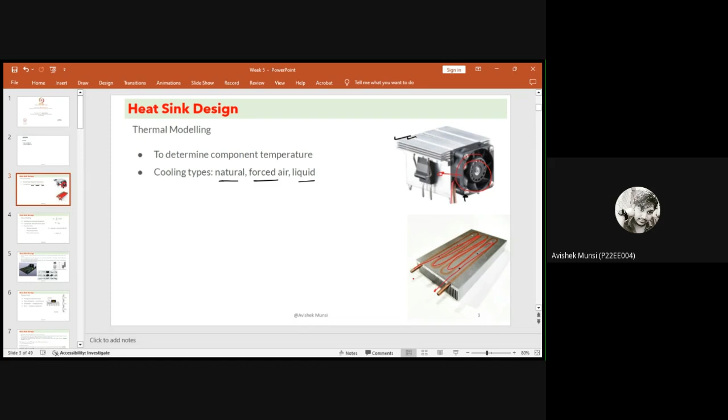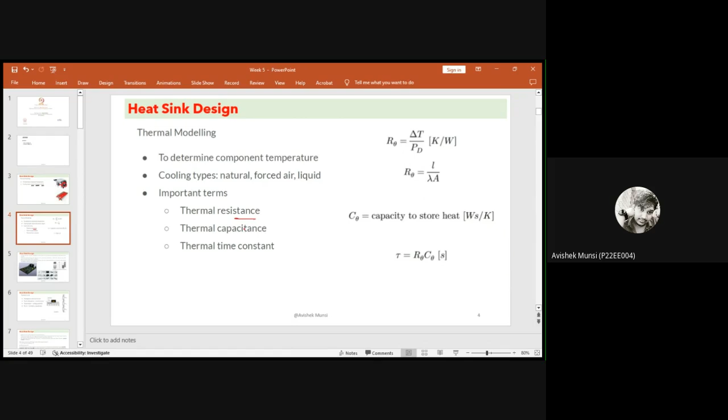So basically what we do in thermal modeling and heatsink design is to determine the component temperature in terms of the thermal resistance, thermal capacitance, and thermal time constant. So basically what is that? If we see what thermal resistance is, that is basically the difference between the temperature of the material.

In some cases, they also use a heatsink behind this PCB, if the heating element is more. Okay. So what happens whenever you're using a heat sink? Suppose this is your MOSFET, right? On the MOSFET, we use some kind of thermal compound, a grease type material, after which we use the heat sink.

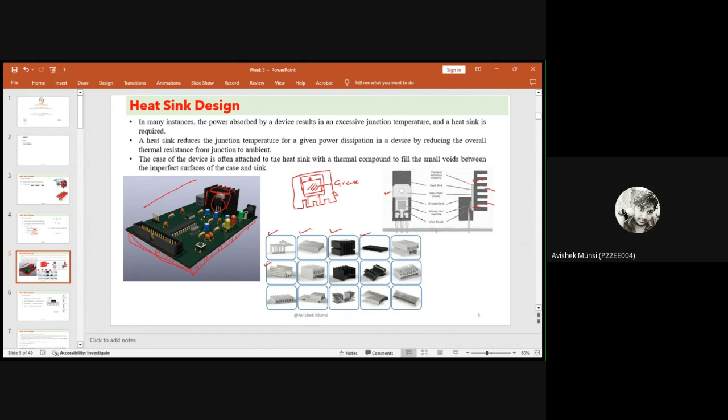Okay. So here you can see that this is the heat sink. This is the MOSFET. So it should have a junction temperature, junction to case, case to sink, and heat sink to ambient, right? So there are a lot of temperatures and resistances we have to consider while designing a heat sink for a specific MOSFET.

So this is the heat sink, and this is our MOSFET, and there is a case. You can consider that this is the case of the MOSFET, after which there is a junction point where the MOSFET touches the heat sink, right? So there will be different resistances according to that. So this is my junction and this is my ambient. Ambient means the surrounding air temperature. Okay, and this is the temperature of the case. This is the temperature of the sink.

Okay, so between the junction and case, there is a resistance R theta JC. Case to sink, there is a resistance R theta CS, and sink to ambient, there is a resistance R theta SA. So there are three resistances: from junction to case, there is the junction to case resistance; then for the sink temperature difference there will be case to sink; and this is ambient or atmospheric normal temperature,

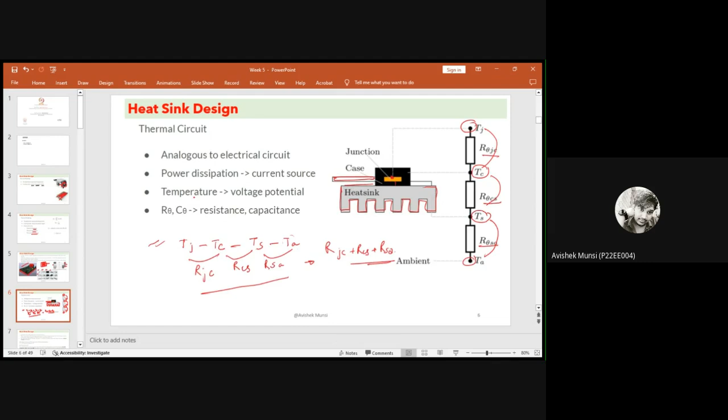So what is basically thermal resistance? From here, if you see, it is a function of the thermal power. So basically the temperature difference between 2 points divided by the power of the component is the thermal resistance. Okay. So how could you write these things?

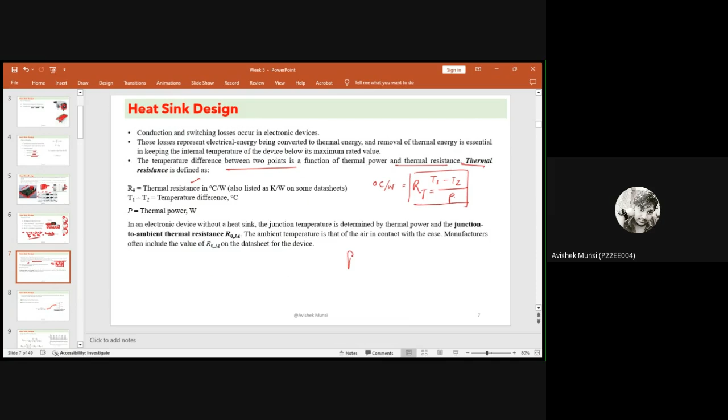From the expression you see that thermal resistance is in degree Celsius per watt. That means the change in temperature divided by power can be written as thermal resistance. So if you have to consider how much power is lost, that will be the temperature difference divided by the thermal resistance.

So if we don't use any heat sink, then that temperature is called the junction to ambient thermal resistance, because in that case you are using a switch directly that is exposed to the surrounding atmosphere, so we have the surrounding temperature, that is the ambient, and we have this junction temperature.

So how much heat it will dissipate: R theta JA is equal to theta J minus theta A by P. So how much power it will dissipate: theta J minus theta A by RJA. By means of this formula, we can solve the basic heat dissipation in a switch. Okay. So in your data sheet, you will find these values.

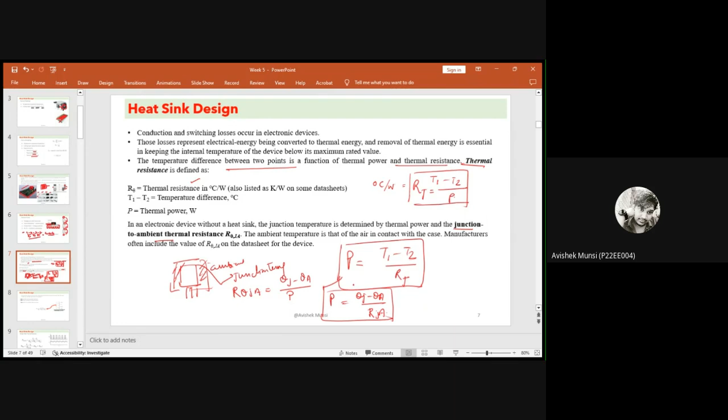Now, if we consider the heat sink, then we have junction, after which we have the case, after which we have the heat sink, and then ambient. So in that case, what will happen? We have the power dissipation, the total change in temperature from the junction to the ambient, and we have to consider all three thermal resistances: junction to case, case to sink, and sink to ambient. Okay. So this is the heat sink power dissipation.

Fine. So after this, if you have any doubts, you can ask me or note it down in your copy. I'm giving 5 minutes to understand this, and after which I will continue.

Jaya Kumar, kindly mute yourself.

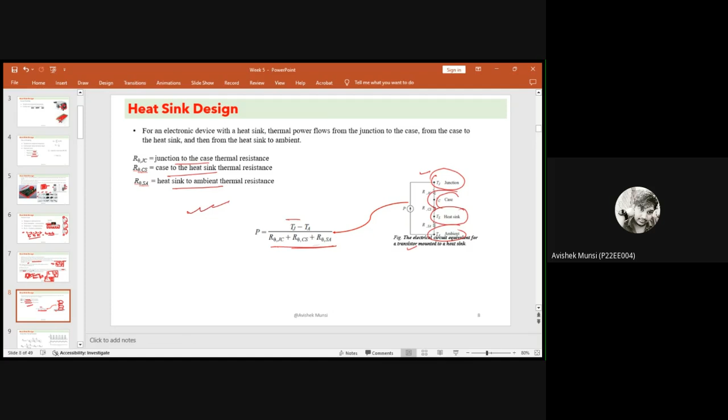So what is the average power then? That is the junction temperature minus the ambient temperature divided by all three resistances, as I said. So if I have to calculate the sink to ambient resistance, how could you calculate it? Basically you just divide the change in temperature by the PD average, minus these two resistances. Right, so that is the sink to ambient resistance.

Okay. If you simulate it in LTspice or anywhere and you get this PD average for any MOSFET, for example, you take this junction temperature based power from there and put it here in a current source, and you put these resistances that are given in the data sheet. If you go through any MOSFET data sheet, you will find these resistances given, if you have to model it like this.

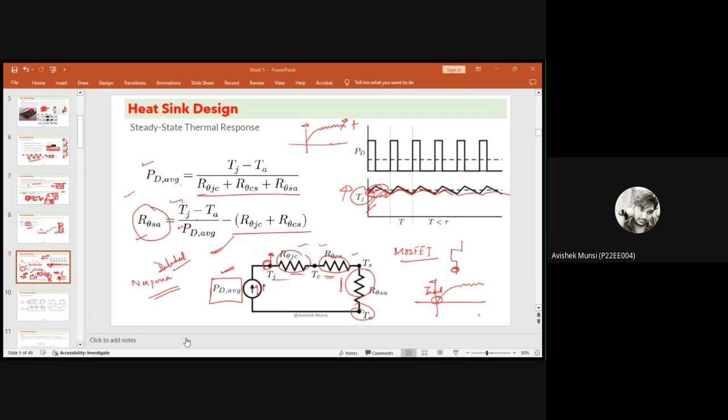I hope you all understand and note it down in your copy. So, as I said, while doing a thermal model, if you go through the datasheet of any MOSFET in Nexperia, that will be more helpful. If you go through the datasheet of any MOSFET in Nexperia, you can see that other than the thermal resistance, they will give some kind of capacitance value also. So basically, this is the RC modeling of thermal modeling.

This is the most conventional method of thermal modeling for any kind of switches. Other than that, you can also model it in finite element analysis software like ANSYS or Flotherm. After designing the PCB of your converter, you can put it over there, and if you mention those values, they will give the areas where the temperature will be high or low. That will be the FE analysis, the thermal analysis done with ANSYS and all.

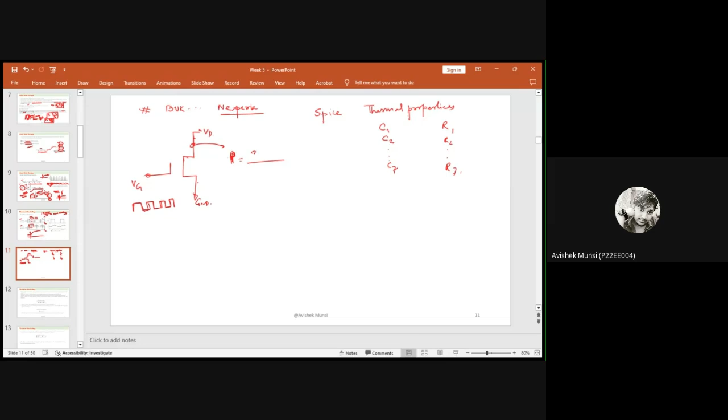If you use LTspice, then by means of Alt+Shift, if you click it here, you are able to understand how much power is dissipated here. So knowing that value, suppose it is x into I plus y into V like this, you just have to put this as a behavioral current source and put this value. And after that you have to model it in either Cauer method or Foster method. Foster method is more preferable. So you can model that.

This is C1, this is R1. Then you have to put this value like C2. Sorry, this is R2, C2, R1, C1. Okay, like this, dot, dot, dot. And finally, after the final one, you have to put the ambient temperature as a voltage source. Either it is 50 degrees Celsius, 25 degrees Celsius, 80 degrees Celsius, you can put it over there. And then you have to run the simulation and check the temperature at this point. That will be the junction temperature.

Okay, so that is how you are able to model the thermal model of any MOSFET. So this is the process of doing thermal modeling of any MOSFET.

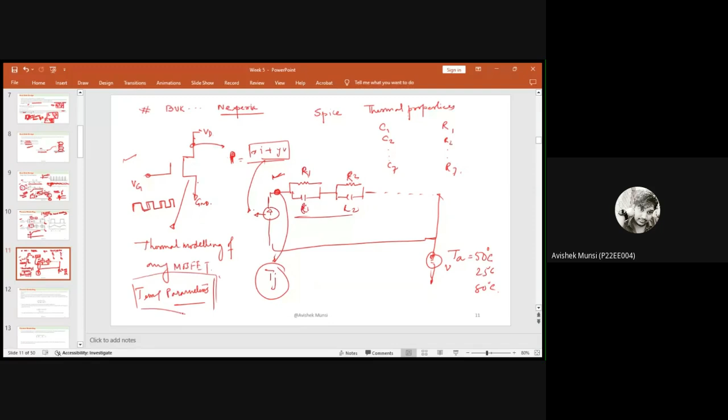If you don't have it, then you have to go through these methods, the Cauer network method or the Foster network method. Okay. So here also you can see that this is the pulse which we give to the MOSFET, and in that region we are able to see how much temperature will rise at that period of time. Okay. So that is the thermal modeling of any kind of MOSFET switch. Okay. So now you can note down the process, and after that we'll move to the next thing.

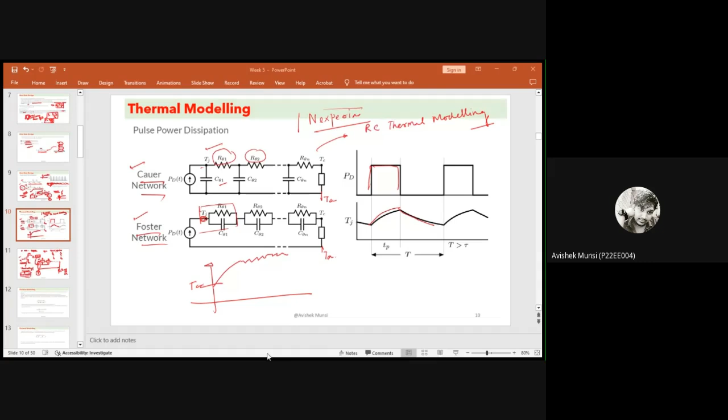Fine. So this is how the thermal models can be done. What is basically the Foster model, which is more preferable? The Foster model is derived by semi-empirically fitting a curve to the thermal impedance ZTH, the result of which is a one-dimensional RC network. You can see it from here. So this is the Foster network. It's one, two, like this, going on up to n number of RC by which you can model it.

The RCs in a Foster model do not correspond to any geometrical location of the physical device. These values cannot be calculated from the device material constants, but they have to be given in the datasheet by the manufacturer, or they should provide the thermal model. Otherwise, you are not able to solve it, as you are not able to calculate the RC inside a MOSFET or any switch, right? So finally, the Foster RC model cannot be divided or interconnected when there is an RC network of a heat sink connected to it. Okay.

By knowing the TJ, T theta inside of the datasheet, they already modeled it into it. So I have to put those things. So Foster RC model has the benefit of ease of expression of thermal impedance ZTH. As I said, this is semi-empirically fitting the curve of the thermal impedance. The Foster model can be done.

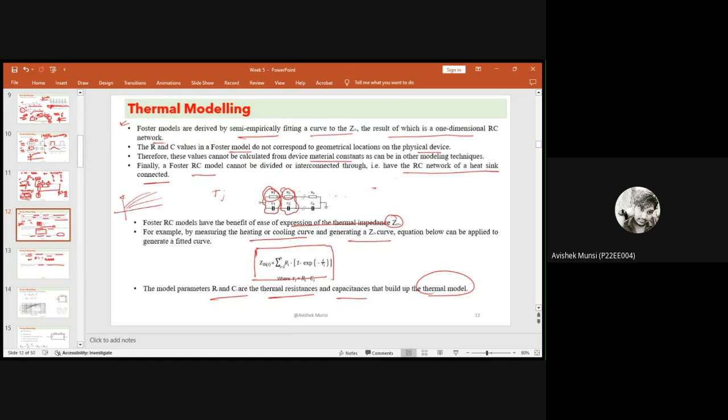Okay, the nodes in the Cauer model can have physical meaning and allow access to temperature. You can check the temperature at this node. Similarly, in Foster, you can also check things at this node like this. In Foster, if you are using it like this, you can check the temperature at these junctions also, but this will not be the actual junction temperature. Okay, so that is how you can model any MOSFET or anything else.

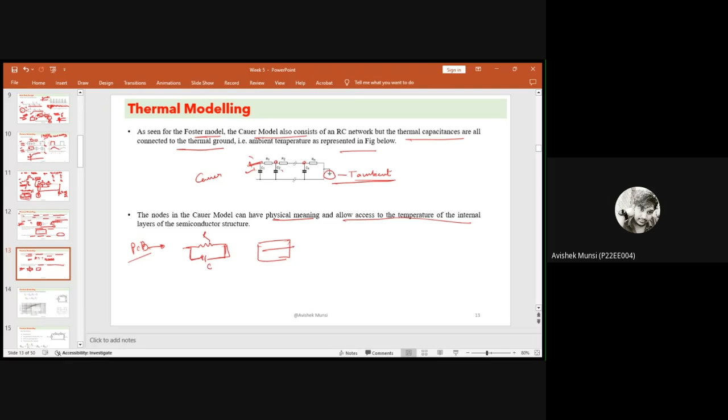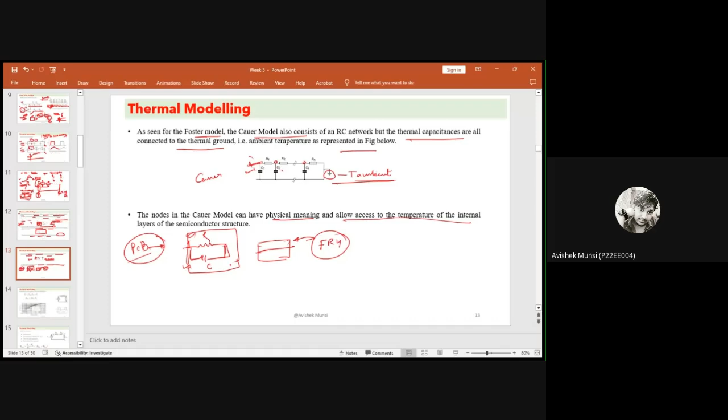But while designing the PCB of any converter, you have to consider the RC thermal model for the PCB also. You have to calculate the capacitance of the PCB by knowing how much copper it uses. By knowing that, you can calculate the PCB's RC models and put them there. Mostly FR4 material is used, right? So for FR4 there are specific values you have to put, and you have to model the PCB's RC also, and in this way you can completely thermal model a converter. Okay.

So as I said, the pulse dissipation method, you can see this is there in the datasheet. There will be a Z curve, the thermal response with respect to the rectangular dissipation. There will be some curve, and according to it they put the values of R and C at various junctions. So you have to put those values while modeling.

In some datasheets, they don't give the extensive values of all the R, C. Rather, they give the thermal impedance as a whole, and you can put that thermal impedance here and also calculate the rising temperature of this junction, how much temperature it can hold and how much it will rise. Okay, so that is how we can thermal model any converter switches, the converter totally with PCB, and have a predetermined value of the temperature rise of the converter.

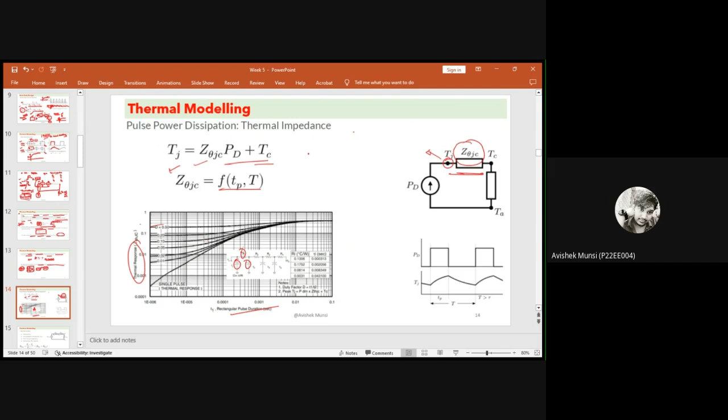So now, how to select the heat sink. While selecting the heat sink, you have to know these temperatures. These are given in the datasheet. If we go through any MOSFET datasheet, you will see they give the junction temperature, case temperature, and so on, based on which you have to calculate the resistance. And based on this resistance, you have to choose the heat sink from the market.

You have to choose the heat sink which has an adequate value with respect to this R theta SA so that it can withstand that amount of temperature. Basically, this is the sink to ambient. So whenever you're using a heat sink after this MOSFET or switch to the ambient, it should provide thermal relief to the switch so that it doesn't heat so much and it will not affect the other components of the converter, right?

So proper designing of the heatsink is important. I see that many people design PCBs without knowing the proper values of their heatsink. They just put a heatsink by buying it from the market. Often it works, but that doesn't mean it will work every time. If you have a temperature greater than that, then that heatsink will not provide any kind of insulation to your PCB or your converter.

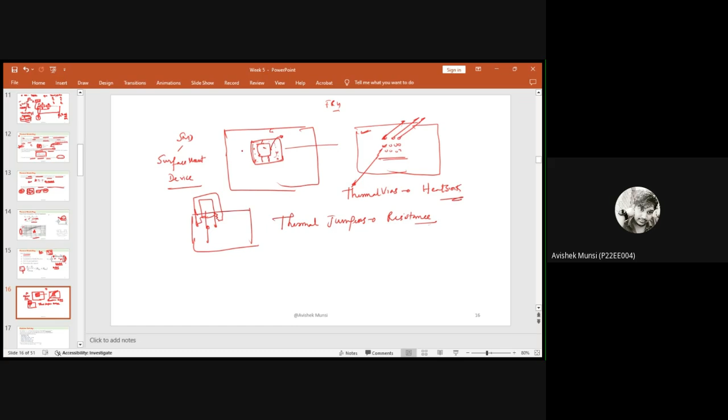If you are not able to create thermal vias because you have a component at the back, like the gate driver on the back side of your MOSFET, then you can create a thermal via here and just connect it by means of these thermal jumpers. So these are the techniques we use in converter design for SMD components. But for through-hole components, you have to directly put the heatsink.

So proper heatsink calculation is very important while designing a converter, and you should keep it in mind. Otherwise, if you put a random heatsink, maybe it will work, but maybe not. So you should go through these things and have predetermined knowledge about how much heat your system can withstand. For that, thermal modeling and the heat sink is one of the most important parts of design.

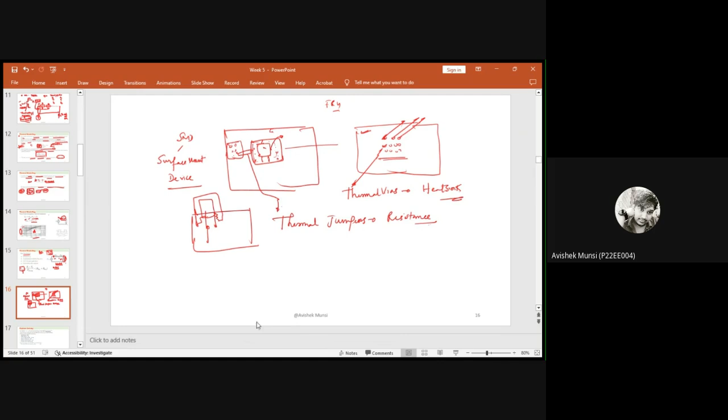Okay. So we will move into some problem solving, and before that, if you have any doubt, you can ask me, because these are very practical things, and you should understand them by your experience of designing converters. By knowing the formulas, you can design it, but if you design by your own experience, you will understand these things. Like I said, for SMD devices we often don't use any heat sink. We use thermal vias and thermal jumpers. These come from the experience of designing converters day by day.

So if you have any doubt, you can ask me, because these are the most practical topics you should go through. Only solving problems will not help you in designing the converter in a practical situation. Okay. So if you have any doubt, you can ask. Otherwise, go through this before moving into the formula-based problem solving. Okay.

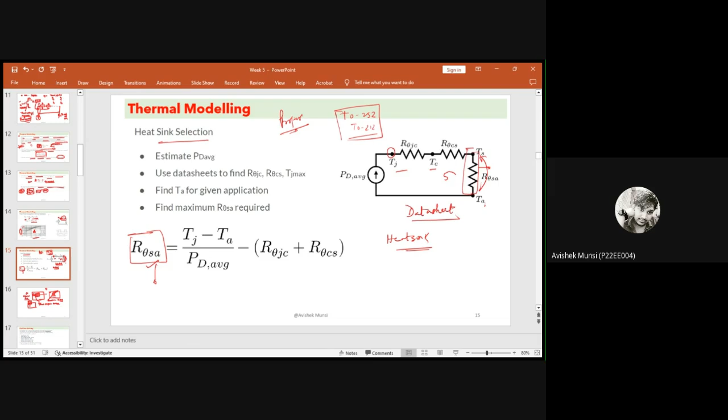Fine, so I understand you already. If you don't have any questions, we're moving into the problem section. So this is the problem. You should download the datasheet for IRF530NPbF, and I will give the datasheet over here also. We are designing a converter with a switching frequency of 100 kilohertz, and the ambient temperature is given as 60 degrees Celsius. The output voltage is 20, input voltage is 40. So that means it is a buck converter.

If you have to design the converter, while designing, you have to go through the datasheet. So from the datasheet of this MOSFET, IRF530N, you have to find what the on-state resistance will be. Firstly, download it. Or if you don't download it, you can see it here. If you download it, you'll be able to see it written at the top. So what will be the value? Kindly download it and then tell me the answer.

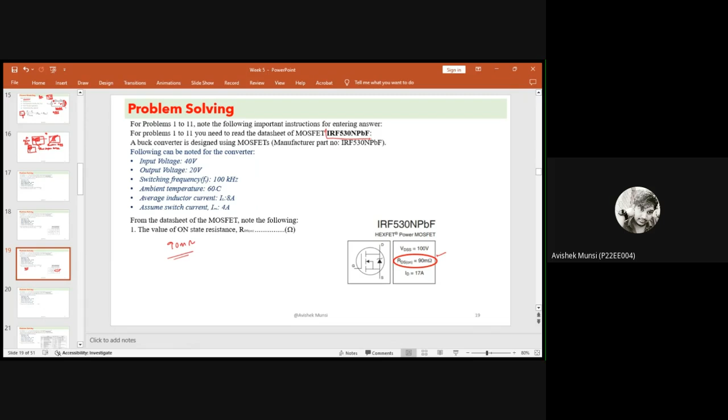Okay. Next question, you have to calculate the typical turn-on time, for which the datasheet is given here. I attached it. Try to calculate the typical turn-on time. I'm giving 2 minutes. Okay. 31.

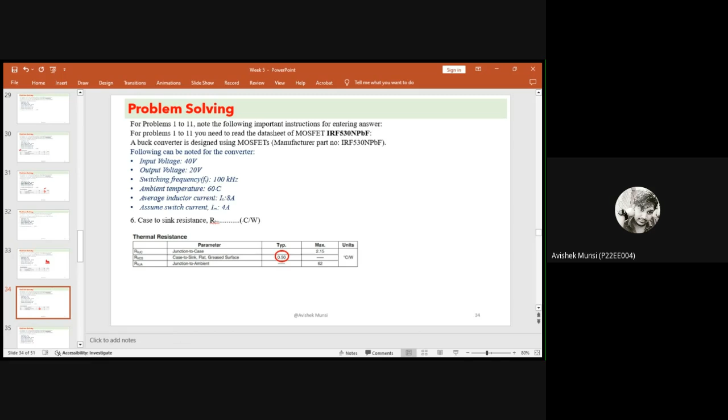So next question, but before moving into that, I'll ask something. We have R theta CS given as 0.50, right? We have R theta JC as 2.15 degrees Celsius per watt, right? We have TJ as 175 degrees Celsius, right? Now, we also have R theta JA given as 62 degrees Celsius per watt, right?

So if we have an ambient temperature of, suppose, 60 degrees, then can you say what will be the power dissipation for this MOSFET? We have all these values in the datasheet, right? And we know the ambient temperature; you can select it because that will be the temperature at which you are conducting your experiment. So what will be the dissipated power? Can anyone calculate it? I'm giving 2 to 3 minutes. Calculate and tell me the answer.

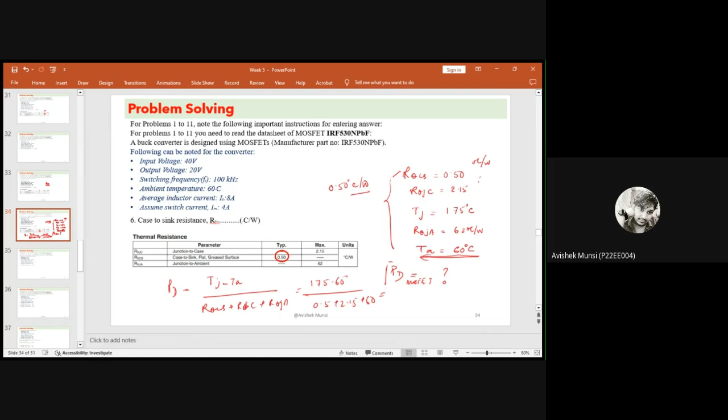Okay, fine. So we are moving to the next question. In this question, you're asked to calculate all the losses: conduction loss, switching loss, and total power loss. Calculate one by one. I'm giving 5 minutes, after which we will solve it. Okay.

So basically, we tried to give you knowledge of how to design the converter switches and heat sink. Last class I discussed the snubber. So basically, step by step, you will understand, right? Fine. So try to solve this one. Okay.